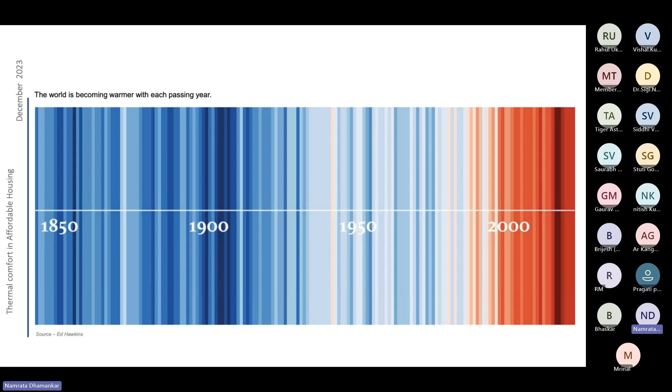Just to build up on some statistics and where we are globally today: we all know that with each passing day and each passing year, we are actually witnessing and experiencing warmer temperatures as years pass by. So what does this actually mean for the residential industry or for the construction industry per se?

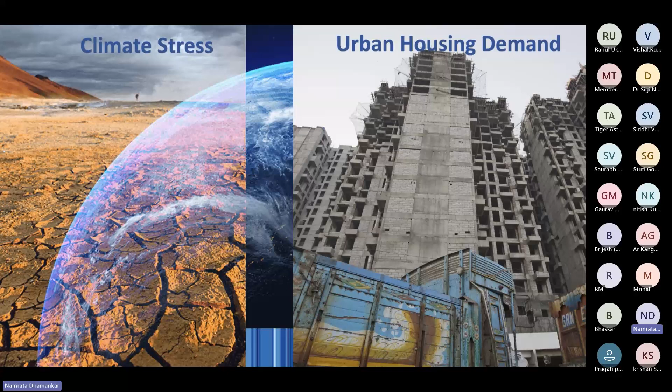On one end, we have the climate stress that we are all undergoing day by day, but along with that, we are also facing a lot of housing demand, as well as a shortfall in this housing demand. So how do we actually balance both these aspects of being climate responsive, relevant in today's times with these climate stresses, and also meet the urban housing demand that we are seeing in a country like India?

We also know that the residential sector in India is expected to rise exponentially in the next 10 to 15 years. But currently, surveys were conducted which actually saw that there is a lot of housing shortage in the urban and rural areas of India.

Government schemes like the PMAY, the Pradhan Mantri Awas Yojana, was one of the initiatives or schemes launched with this particular aspect, to actually reduce this housing shortage that was experienced.

With these policies, or many other such policies that the government has come up with, what we actually see is an opportunity to really evaluate, demonstrate and build housing that focuses on providing not just thermal comfort, but at the same time also minimizing energy and resource efficiency, or resource use, in this entire construction industry.

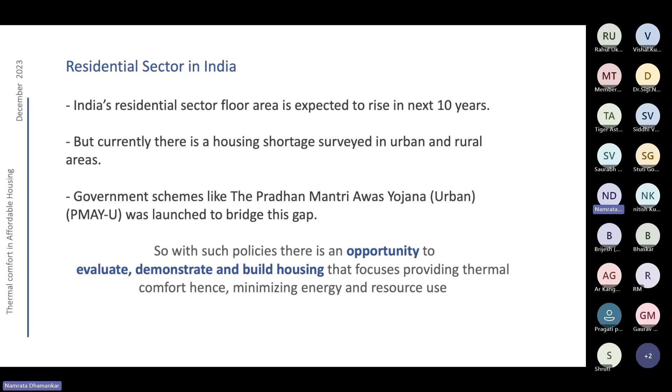So if we start looking at this housing shortage, or now the demand with these government schemes, you will actually see that in the next 10 years we are going to have a huge stock of buildings sprawling all across our urban centers. So how can we use this as an opportunity to demonstrate not just thermal comfort but also resource efficiency? That is something we really need to think about.

But at the same time, due to this shortage of housing and the demand for more residential housing, what has happened over the years is that because they want to scale up and meet these demands, there has been an adaptability of cheaper technologies and methods that can increase the pace of construction and reduce the cost. This has also led to a neglect of actually providing comfortable spaces for occupants, and also leading to the use of technologies which are not relevant in the context of the climate change scenarios that we are facing.

There is also no direct target focus on buildings which are future ready, because we all know that the buildings that are going to get built today are going to be there for the next 50 odd years, right? So how are we actually constructing these buildings today which are actually future ready? How are they actually going to be resilient towards the disasters or the natural calamities that we all are facing? One of them being typically the heat stress, which has a direct relevance with today's topic of thermal comfort.

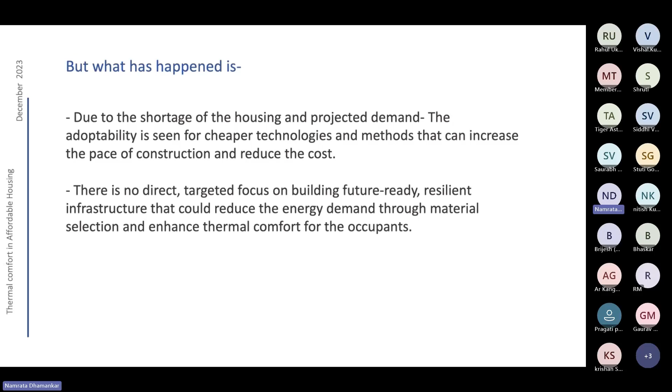And also with the growing energy demand, how are we actually moving towards better material selection? How are we actually trying to enhance thermal comfort for occupants? So this is something that we really need to give a thought to. This is something that has become a real pain point or a challenge for the construction industry.

At the same time, just to talk a little about this particular topic of providing thermal comfort in the construction industry per se, I'm not very focused on the residential sector, but the construction industry in general. There are a lot of codes and standards, or schemes, which actually show the relevance of national priorities. So for example, we have the Energy Conservation Building Code for the residential sector, or the Eco Niwas Samhita, which sets minimum building envelope performance standards, right? To limit heat gain, heat losses, and also for adequate natural ventilation along with daylight.

And also now further including how appliances and energy efficiency along with renewable energy can actually be brought holistically into this entire framework of the ECBC-R. Along with that, the National Building Code was also revised in 2016, which further set minimum standards for thermal comfort and construction practices. So we have that also in place, which is a big standard or code that India practices.

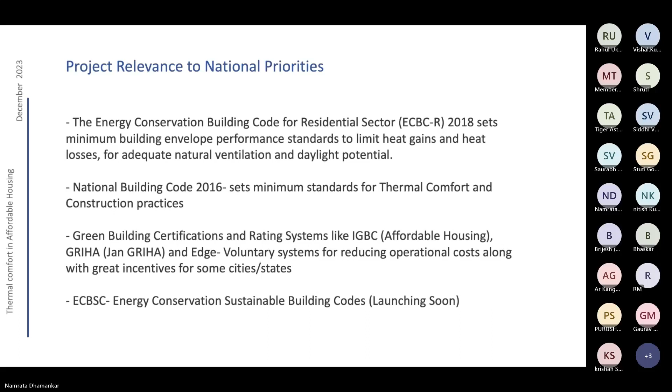And now soon we are also talking about the energy conservation sustainable building codes, which will definitely come to the market soon. There is a lot of work that has been done at the back end to launch these codes. So this also will see a big jump in relevance to this entire national priority that we have.

What also happens in this sector that we are dealing with, which is the construction industry as a whole, is that we have to deal with multiple stakeholders, right? Multiple stakeholders ranging right from the occupant who is actually using these spaces, for example, the homes that we are building, to manufacturers, to architects, to other green building professionals, to government bodies, right till ULBs, which actually certify or look at how these schemes are built, right?

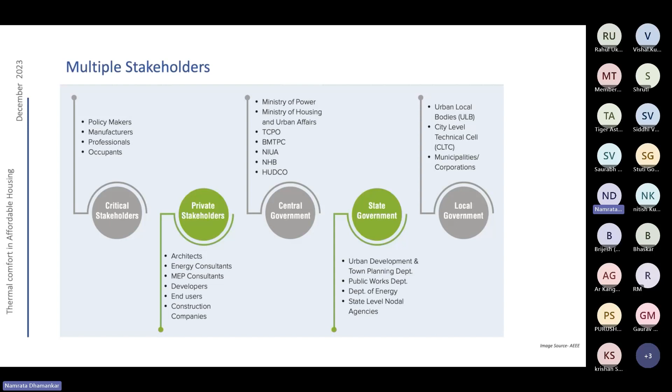So the involvement of these multiple stakeholders and actually working holistically is again one of the challenges, where there is a lot that needs to be done with respect to how we look at this entire gamut of stakeholders that we have, and how we listen to each one of them and bring all of them on one page, right? So this, like I said, is currently proving to be a big challenge for the industry. So stakeholders is something that needs to be addressed more efficiently.

Now, with this background, I will move towards the built environment and thermal comfort, which is the topic for today's discussion. Today we are not only talking about buildings being thermally comfortable, we are also talking about moving towards net zero. We are talking about how the entire built environment can move towards being net zero in terms of energy, water, and waste, and further, how we move towards a net zero carbon built environment.

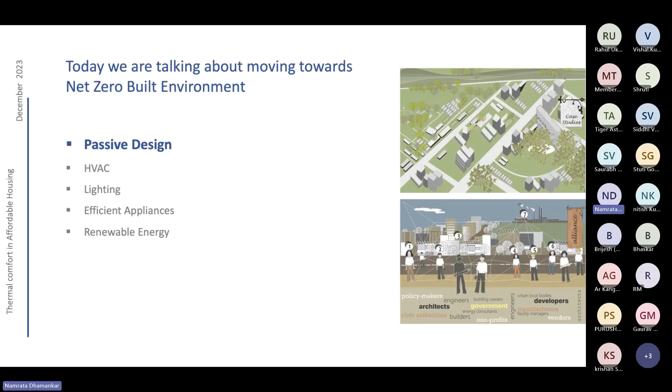A major aspect when moving towards a net zero built environment is passive design, along with active measures like your air conditioning systems, your lighting, your appliances, and the last in the pyramid is your renewable energy. But forming a very large part of moving towards an efficient built environment is passive design; providing passive design strategies in your built environment is a major priority.

So why is thermal comfort so significant? We all know that more than 90% of our time is spent indoors, be it your homes or your offices. When we talk about the affordable housing sector, the cultural context we are dealing with is that the affordable houses we are building are used primarily by women throughout the day.

So these homes are not unoccupied during the day, and there is an urgent need to address thermal comfort not just during the night, but for the entire 24 hours. Thermal comfort not only enhances the ease of living, but also has a direct impact on the active systems and resources that we are using. Thermal comfort holds a lot of significance when we are designing buildings.

The audience here might definitely know, but I'll touch upon what we are trying to achieve with thermal comfort. The objective of any building design is to keep people comfortable. We are designing buildings for people, so it's more of an occupant-centric design.

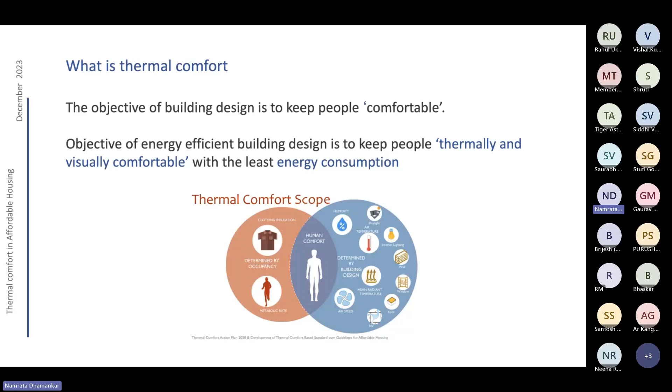Apart from these are the psychological or physiological parameters of thermal comfort, which are very personal to the occupant, such as clothing and metabolic rate. I'll come to this point later, how even the personal parameters need to be accounted for when scaling up to design thermally comfortable buildings.

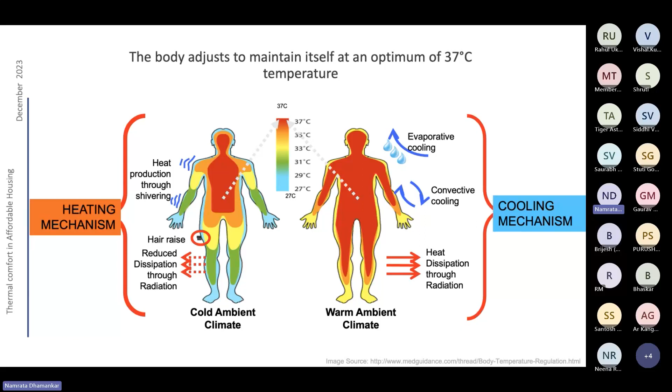The ultimate aim of thermally comfortable buildings is to have a cooling or heating mechanism in place, similar to how your body activates. Our body temperature is maintained at about 37 to 37.5 degrees Celsius. Depending on the outdoor climate, our body adapts by either losing or gaining heat, exchanging heat with the ambient environment.

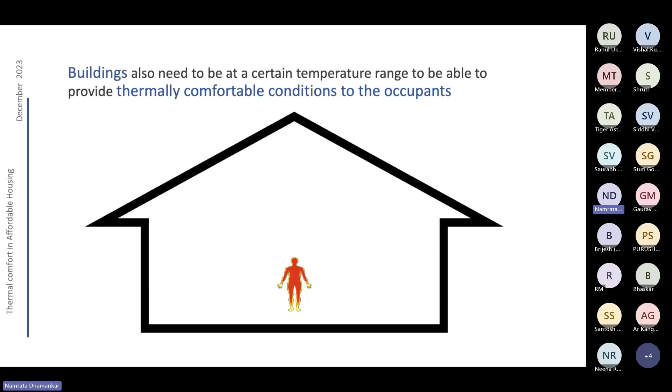Similarly, like humans, buildings also need to be maintained at a certain temperature. They need to be provided with thermally comfortable conditions to provide thermal comfort to the occupants of that building.

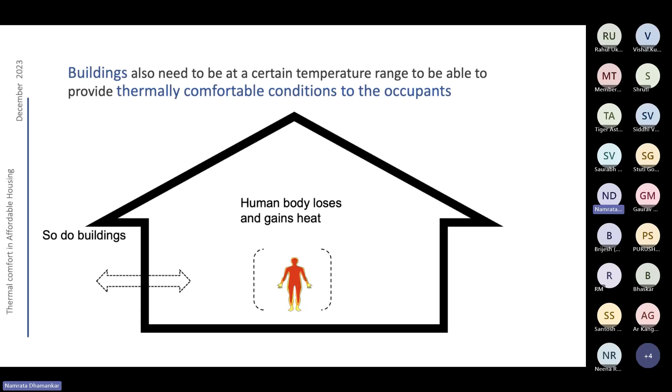So with the heat exchanges that are happening within the building, along with the human body losing and gaining heat, there are multiple other components also that are leading to this heat gain. So I'll just skip this and move to this diagram where we are talking about how this heat exchange is actually happening, right?

The heat exchange that is happening to provide thermal comfort inside is actually based on the three processes of conduction, convection, and radiation. The heat transfer that is happening through conduction, as all of us know, is primarily through the building envelope, right? That is a major source of heat conduction in our buildings. Convection is obviously the parameter of ventilation or air movement in our building to actually take out the heat that has accumulated in the building.

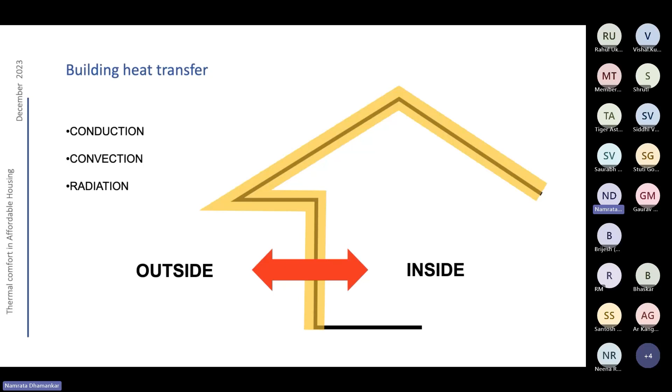And then we are also talking about radiative heat or radiation, which typically comes inside our buildings through transparent surfaces like windows and glass openings. So actually balancing all these three heat transfer mechanisms in our building is what is going to lead to a thermally comfortable building.

So how do we do that? What needs to be done in order to maintain this balance is to balance it out with respect to passive and active means. When we are talking about passive design, we are talking about climate responsive design, trying to encourage natural heating or cooling or ventilation in our building, along with, of course, lighting.

The second part: as designers or as architects, we are not really trying to move our focus away from active designs. But what we are trying to emphasize is how we follow a step-by-step systematic methodology to move from passive design, leveraging the climate responsive design alternatives that we have, and then move towards active. In active also, what we really need is to move towards the adoption of low energy cooling active means, and not rely on just air conditioning that all of us typically know about today. So adopting low energy cooling systems should hold more relevance when we are talking about moving towards a thermally comfortable space.

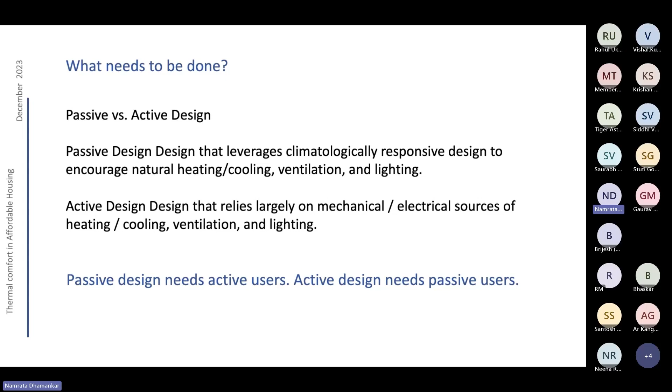So what we are really trying to achieve here is that passive design really needs more active users. We really need to promote more passive design strategies in our buildings when we are designing affordable housing. And we are also further saying that active design needs to be more passive rather than the other way around, which we can typically see today.

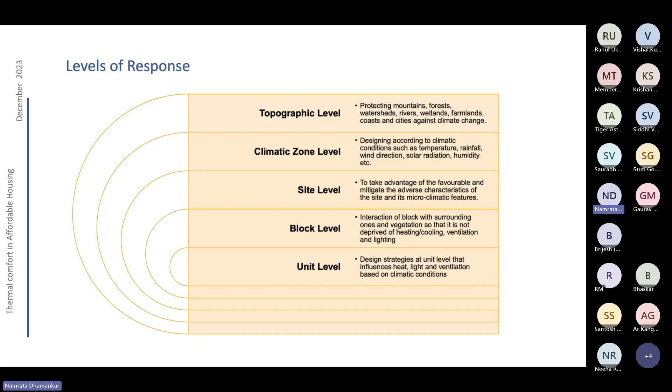So again, with this, we all know that when we typically look at the psychrometric chart, or we look at the comfort zone that most of us are aware about, every climate has its own comfort potential that we can see through the psychrometric chart or through the thermal comfort band.

What we really need to do is first move towards adapting passive means, and once we have that extended comfort band that we can range with, then move towards low energy or more adequate active means that we can adopt into a building to further accommodate higher temperature differences that we see between the indoor and the outdoor.

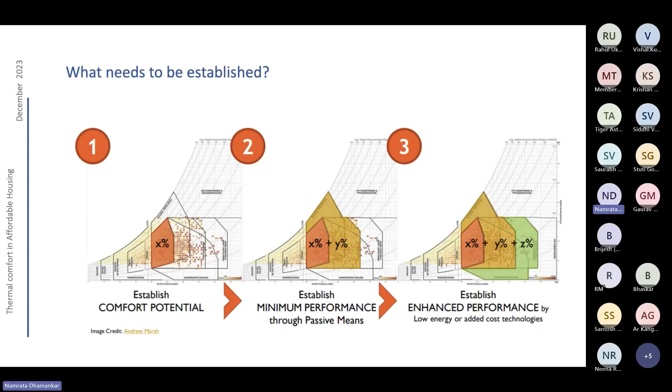Again, I'm not going to talk a lot of details with this, but when we are talking about passive strategies, we are talking right from the form and orientation of buildings, how that should be taken into account. We are talking about orientation. We are talking about how use of topography to actually orient your building, as well as place your buildings in a particular climate zone, plays a very important role.

We are then talking about a very important aspect when we are talking about not just glass or the building envelope, but we first have to prioritize low hanging fruits, for example, shading devices. Shading devices typically are your low hanging fruits, which will give you a lot of benefit in terms of reducing your thermal comfort requirements.

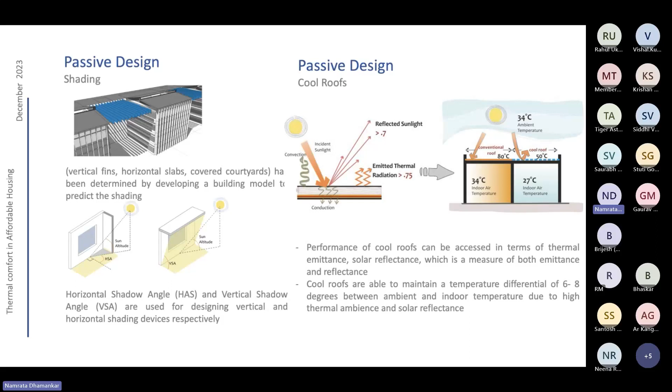And then we are also talking about one more strategy where we are talking about cool roofs. How do we actually reduce the heat that we are gaining through the roofs of our building? So cool roof again can be a passive strategy that can be adopted. Of course, this is more relevant to the low rise building stock, where the roof is gaining the maximum heat, but apart from that, what cool roofs also do at a larger area is actually help you reduce your urban heat island effect.

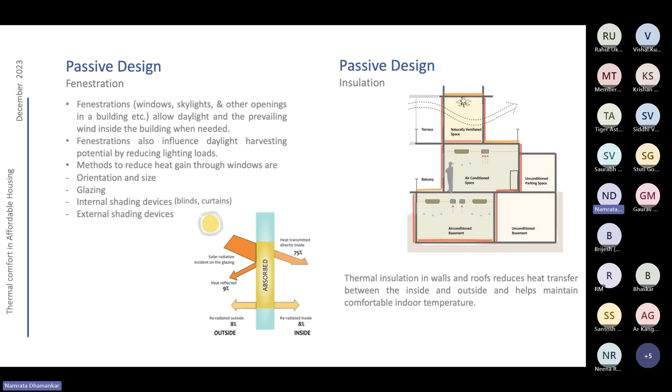Then, like I mentioned, we are talking about fenestration also. How do we actually design our fenestration with respect to the orientation, the sizes, the type of glazing that we are using, as well as the external and internal shading. Insulation, when I say insulation, I'm not just talking about building materials, where you're insulating the entire building envelope, but we are also talking about creating buffer spaces and those kind of design interventions that can actually help us achieve thermal comfort.

Daylight ventilation, I think I've spoken about this. I will move ahead. And then, of course, at a site level, we are also talking about providing more low hanging fruits in terms of trying to create a microclimate on your site with respect to vegetation and landscape features that we have.

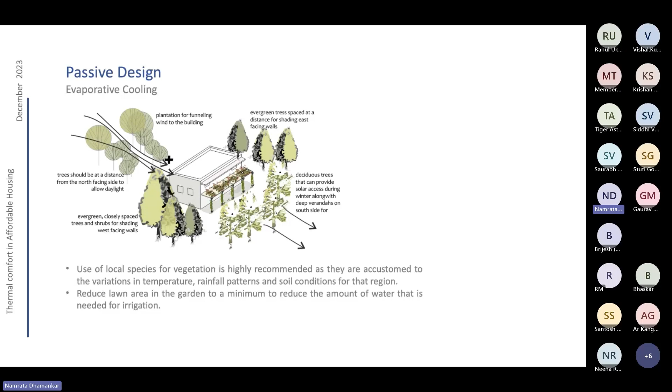So the adaptation of these passive strategies, what will this actually lead to? It's going to definitely lead to a lot of mainstreaming of passive strategies in buildings for thermal comfort. And we all know that it's going to significantly reduce our cooling demand. It's going to provide us good ventilation and lighting in our buildings. It's also going to lead to lesser dependency on mechanical cooling and heating through active means, and also indirectly lead to a decrease in the GHG emissions that we have.

Also, the adoption of these passive strategies in the affordable housing sector or the residential sector is going to lead to greater awareness across all sections of the society. The strata of the society that we are talking about today is the affordable housing sector. Creating awareness amongst them by the use of these passive design strategies is going to definitely go a long way. And lastly, sensitivity in the building practices will obviously tend to decrease the disparity that we see with respect to thermal comfort across the strata of the society or different economic classes.

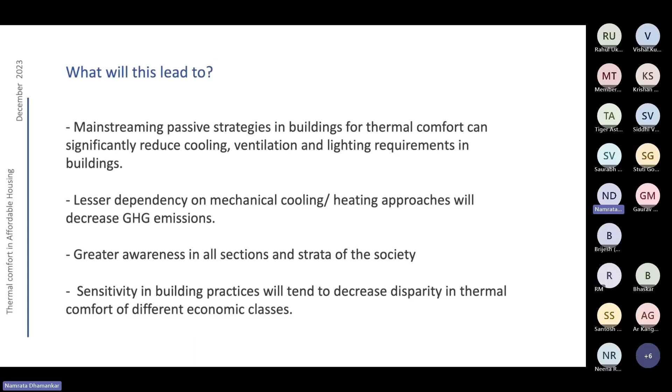Just to talk a little about how building codes today are also already dealing with these issues, but the challenge here remains actually falling back on these codes and compliances to design our buildings. A very relevant code that we need to look at is obviously, like I have already mentioned, the National Building Code. The Eco-Niwas Samhita again has its own challenges. There is a lot of research being done to try to understand what are the challenges that we are facing with the Eco-Niwas Samhita.

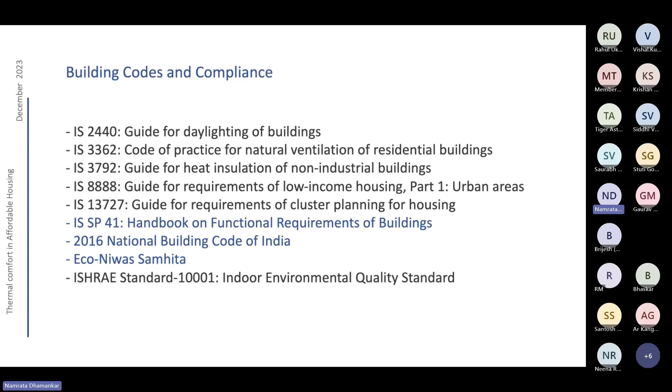We also have the IS SP 41, which is the Handbook on Functional Requirements of Buildings, where we already have indices to look at how thermal comfort is measured. Effectively, there are two indices that the SP 41 talks about. One of them is effective temperature, and the other is tropical summer index.

So again, I'm not going to get into details of what each one of them means, but just telling you a little about them. These are scales or indices which are not really very commonly used when we are talking about designing passive buildings or thermally comfortable buildings.

So tropical summer index as an index is very relevant because it takes into consideration the living habits of the occupants. It's talking about clothing patterns. So all of this together is what this particular index looks at. So it's very relevant that we as designers are using these indices to design buildings which are more comfortable.

So what the TSI talks about is trying to have a comfortable range of 25 degrees to 30 degrees, and optimizing it at 27.5. Further, we also have something which is very relevant as an index today, the IMAC model, which is the Indian Model for Adaptive Comfort. So that has been a game changer.

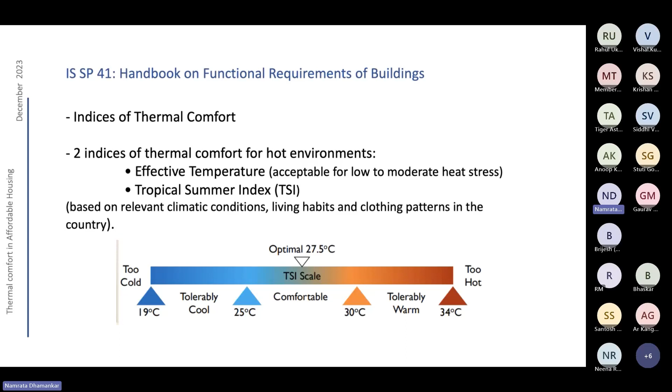But again, the adoption of this index and actually designing buildings as per the IMAC model is something that is not seen in the market today. I'll just move on.

In terms of the challenges, I think I just spoke about this, but designing buildings using passive strategies for comfort performance of unconditioned naturally ventilated buildings. Indices for thermal comfort today are not really used while designing buildings. Extensive research needs to be carried out on dwelling unit characteristics, the building materials used, construction technologies, policies and codes, and how they're getting implemented, from across the globe. There has definitely been a lot of work done.

It's not that it's absolutely not there, but it needs to be scaled up to a level where a lot of post-occupancy evaluation is carried out extensively to identify gaps and come out with strategic design interventions. So post-occupancy evaluations of residential buildings need to be scaled up and carried out extensively, and I hope that we can contribute more towards data collection from existing building stock.

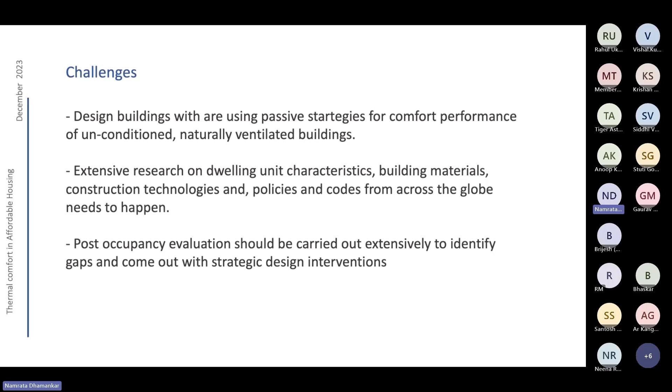Further, after we spoke a little about passive strategies, now we'll quickly move towards active strategies and how, along with passive strategies, we should also adopt low energy active strategies. And then I will end with showing you two works that I have been a part of as case studies.

So one of the newer areas is that thermal comfort is not in isolation, right? When we are talking about thermal comfort, we are also talking about energy demand, which is a very major aspect, especially in a tropical country like ours, the majority being warm and humid and hot and dry. We know that the use of air conditioning and electric fans is on the rise, and the use of air conditioning is set to rise further.

About 11% per annum is what it is projected to rise, and there are studies showing this use of air conditioning is going to go up to 20-25% in the coming years. So what this means for us as designers is: how do we stop this catastrophe that we are moving towards? How do we mainstream low energy cooling systems into our buildings, and scale up these other active means that are in the market?

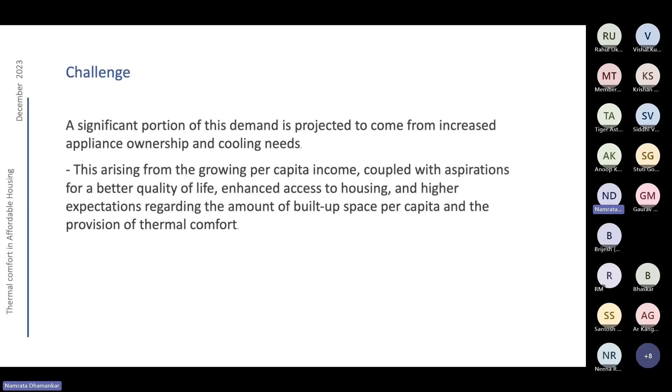However, despite this, we are also seeing that, like I mentioned, it is projected that air conditioning penetration over the next 20 years is going to rise quite a lot. But at the same time, there is still a large section of society that will still not be able to afford air conditioning, right? That again is a very major chunk of the population that we have in our country.

That is again a significant portion of the households that we need to tackle. But here what we are seeing is that even if they can't afford air conditioning, what we are actually seeing in these houses is that they are not even provided with basic thermal comfortable spaces. So they don't even have the bare minimum to the level that they can actually use the indoors they are living in. And this is also happening because of rising temperatures that we are seeing.

Heat stress in our cities is also leading to a lot of accumulation of higher temperatures indoors. Houses that are very poorly designed, not ventilated. So all this together is actually leading to indoors which are very, very uncomfortable. And it's having a direct impact on the occupants' productivity and health as well.

So thus, building climate resilient and thermally comfortable housing for this section of society, where we are talking about EWS or LIG households, will not only reduce energy consumption, but will also contribute positively towards the overall quality of their life and their productivity.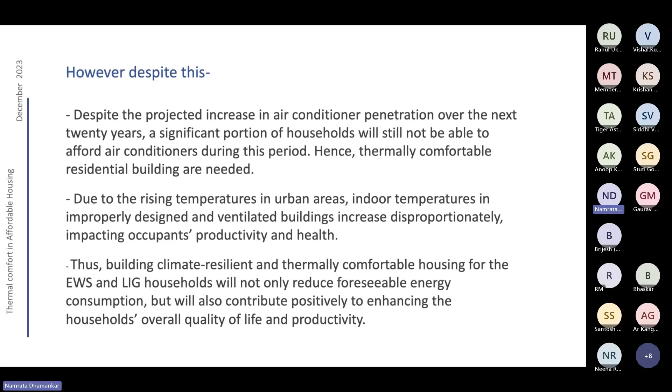One sector I have not touched upon, but will talk about briefly in the case study, is the housing stock related to the construction industry growing multifold. Along with that, what is also increasing is the demand for migrant workers' housing, because in order for us to have these construction buildings coming up, we are also looking at construction workers, and they tend to stay in temporary, inefficient housing. So again, that is something I will briefly talk about in my case study.

A little bit about the drawbacks of using this—there is a lot of research that has been done. Some of us at the institute where I teach have also done research about what is really happening with the ENS, and how it is really a tool or mechanism that typically focuses on just improving the thermal performance of the building envelope, particularly walls, roofs, and windows. One of the drawbacks we've seen is that most of our certification systems primarily use this as a code that we need to follow.

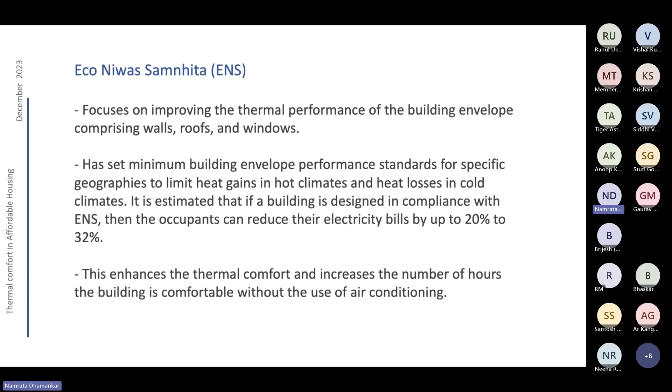But there is no thought given to the fact that a lot of our construction happening today is monolithic construction, for example. There was a study done where we can see that apart from AAC blocks, conventional bricks, and fly ash bricks, one of the major construction materials used today in the housing sector is also monolithic or Mivan technology, as they call it.

Now, if you look at Mivan technology, especially from where I come from, Pune, we see a lot of housing schemes coming up in Mivan technology or monolithic construction. The advantages, of course, I'm sure all of you know, is the faster or speedier pace of construction. But one of the things we are actually losing out on is the thermal comfort aspect of it. With this kind of fallback mechanism, when we try to achieve the targets set by the ENS for a certain RETV value for the building envelope, at times we are not able to achieve this when using construction technologies like monolithic, right?

So how do we address this? How do we actually create awareness amongst developers and builders that this is something they need to look into?

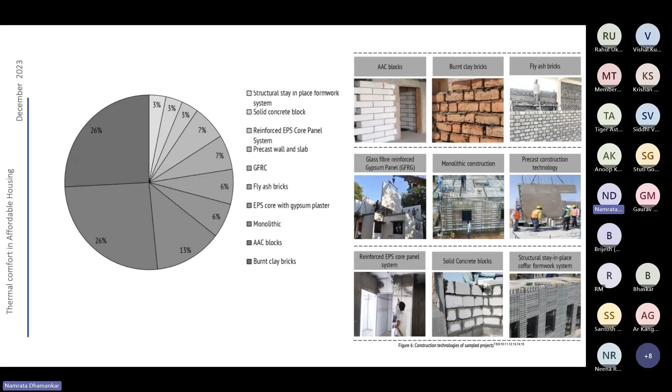Primarily, we know that every building, or the thermal mass of a particular material or wall section or roof section, also has a great impact on providing thermal comfort in buildings, which is absolutely not addressed when we are talking about ENS as a system. So these are again challenges with the codes and compliances that we have, and we really need to focus, look into, or retrospect as to how we can better this up.

Again, we have a lot of affordable certification systems that are there, be it GRIHA, be it IGBC. All these certification systems really talk about trying to say use passive strategies in your building. So as architects, it becomes very relevant for us to actually adopt these passive design strategies when we are designing buildings in this particular affordable housing sector.

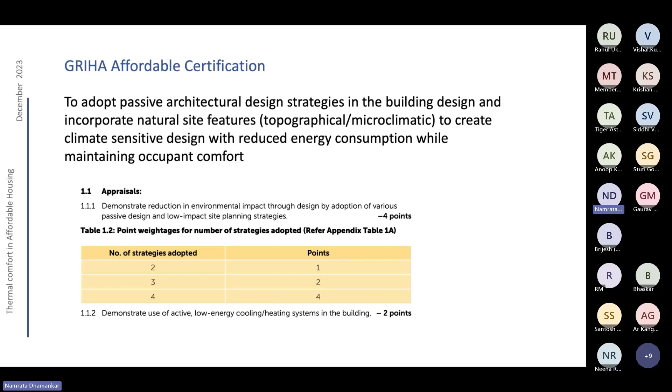So just some snapshots to show you how these rating systems are also addressing this particular aspect. In terms of falling back on the same system of ENS, rating systems are also talking about achieving certain thresholds with respect to building envelope, in terms of envelope peak heat gain factor, and how for different climates there are different thresholds that we need to meet.

This is something we need to look more into detail, because the adoption of these rating systems is seen very large, as the government with schemes like the Pradhan Mantri Awas Yojana has made it a mandate to look at these rating systems as a compliance option as well. But what is really happening is that the material palette we are right now working with is not really adequate, and we really need more research done on the kind of building materials we are using.

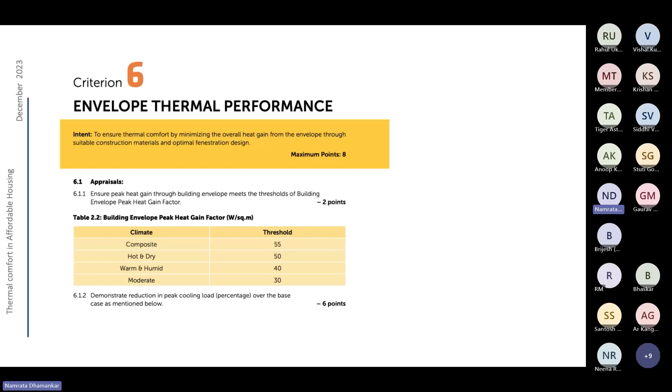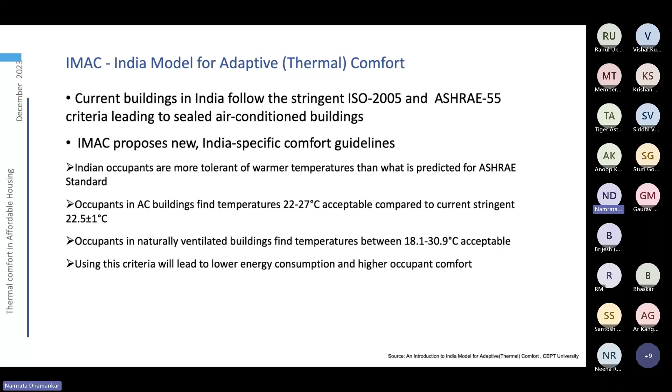Yes, I think we already spoke about the IMAC model. This has again been something that has really revolutionized the entire thermal comfort outlook when we are designing buildings. So again, I'll not really talk much about this.

I think ultimately, this is a reference I've got from an AEEE report itself, that what we are really trying to achieve at the end of it is a balance of trying to look at both passive as well as active means, right? The first prioritization should obviously be given to where we are talking about trying to be lean with better building design, trying to adopt thermal comfort standards, trying to look at the relevant building energy codes that are there.

Then try to be mean when we are looking at standards and labelings of our energy consumptions, looking at intelligent buildings, intelligent facades, trying to look at how we are looking at demand response and systems which are ready for it. And then ultimately what we really need to go for is try to be green when we are trying to move towards a net zero or net carbon sort of scenario.

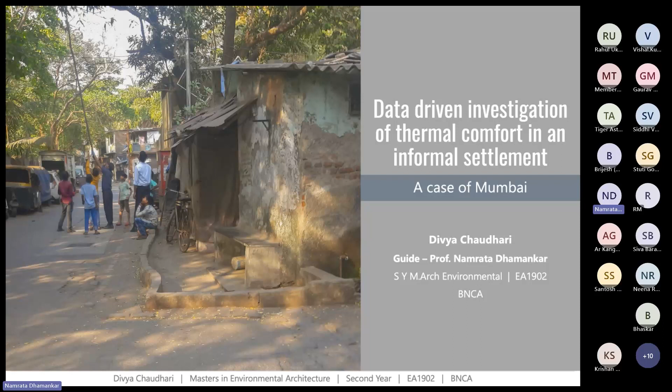So just something that is very different, because I'm sure I didn't want to give you the same examples of case studies which are easily and readily available on the internet, where we are talking about how a lot of work has been done into affordable housing. But I wanted to give you a different perspective, that along with affordable housing, today we are also dealing with a lot of informal settlement, or the existing building stock in this particular sector of informal settlement that we have, and how things also need to change in regards to that.

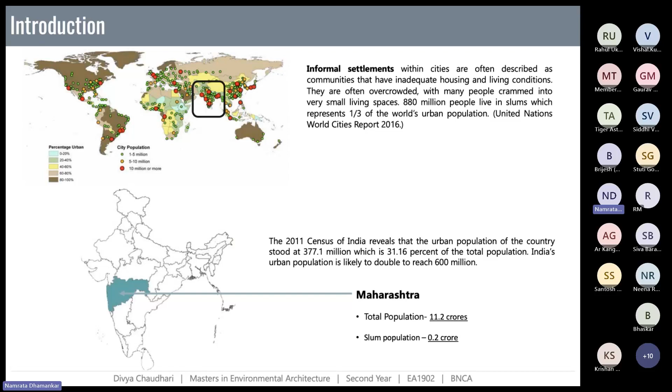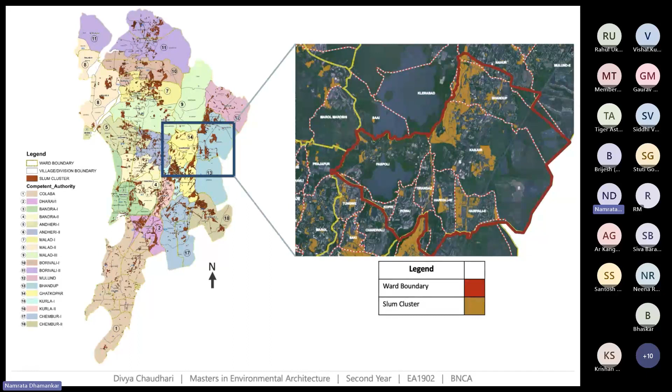So, a small case study or live data-driven investigation for the informal settlements in Mumbai. This was a student, Divya, who looked at how we could come out with solutions for informal settlements, aiming at studying both indoor and outdoor thermal comfort.

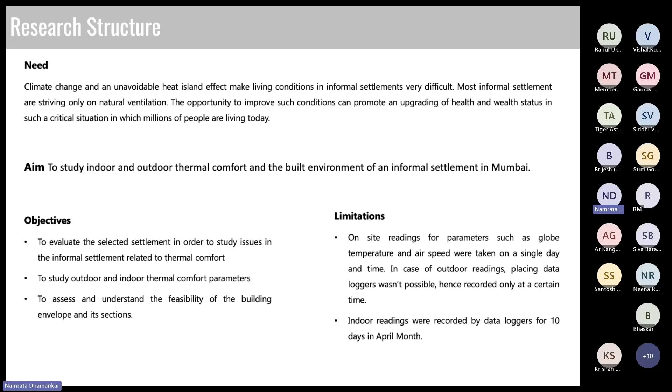The objective was to evaluate the selected settlement for parameters of thermal comfort. She studied and assessed different building envelopes and how they could be retrofitted in existing conditions. She took site readings for air temperature and MRT over a period of time, looking at the current situation in these houses.

She had to relate this with thermal comfort, since that was a priority in her study.

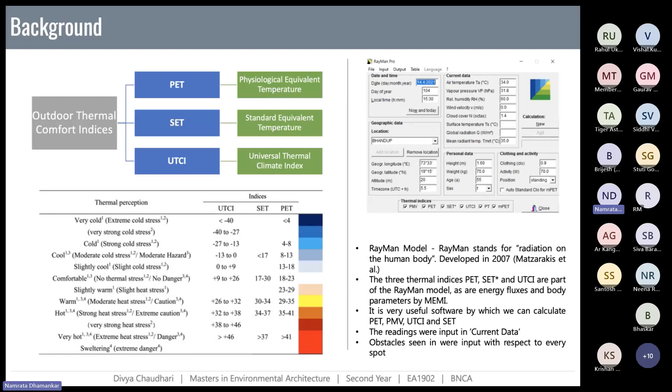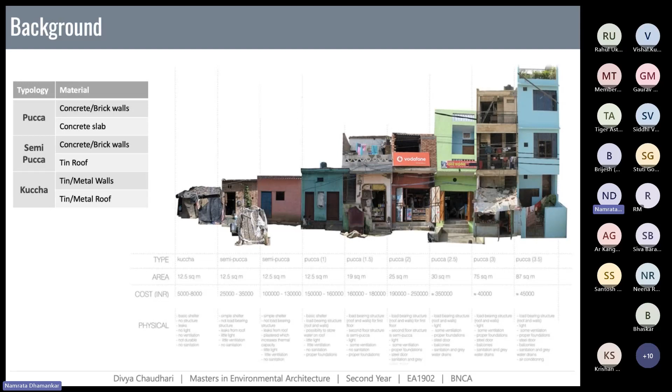So, to give background on the housing stock, the typology ranged from pucca houses built in concrete and brick, to semi-pucca, to kuccha houses which were just tin and metal walls—an entire range of housing within the informal settlement she was dealing with.

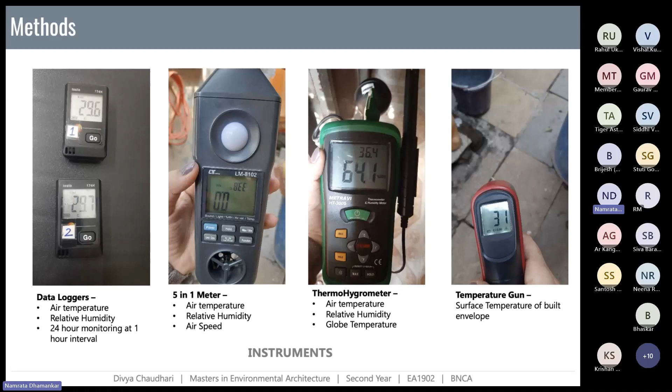Actual on-site measurements were taken for air temperature, globe temperature, and surface temperatures as well. She looked at surface temperatures for the outdoor thermal comfort she was studying, because it was noticed that informal settlement occupants typically spend a lot of time in intermediate spaces between houses.

Occupants spend a lot of time in these intermediate spaces between two houses, and women in particular spend a lot of time outdoors. So both indoor and outdoor comfort were studied.

The temperatures measured were put into the thermal comfort tool and checked for relevance.

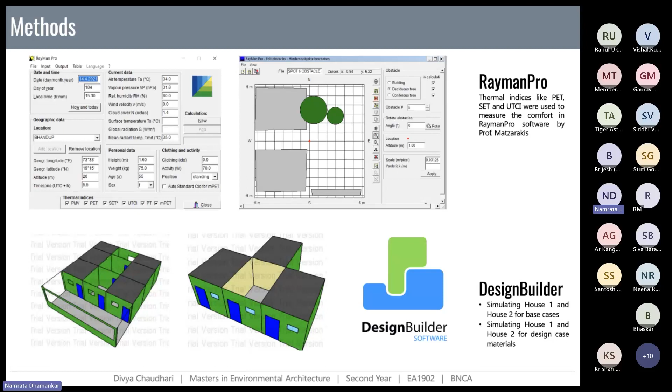There were also simulation studies to understand which roof sections would work. Why roof sections? Because in informal settlements, walls are typically shared common walls between adjacent houses, so walls were never really a problem for heat gain—it was the roof causing discomfort due to its material properties.

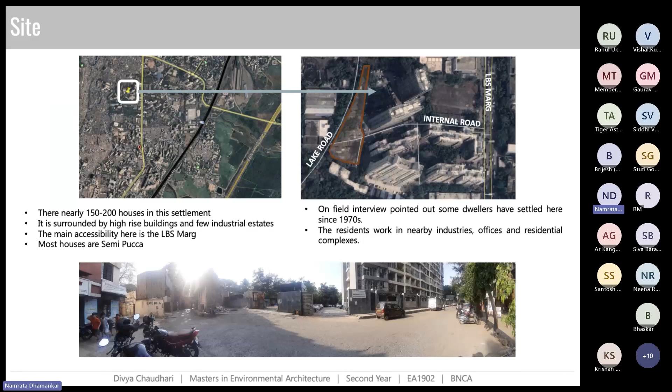Bhandup in Mumbai was the area selected, to study the existing situations we were dealing with.

Two households were taken. One was a semi-pucca house, G+1, with a tin roof and corrugated roofing sheet—very typical of these informal settlements.

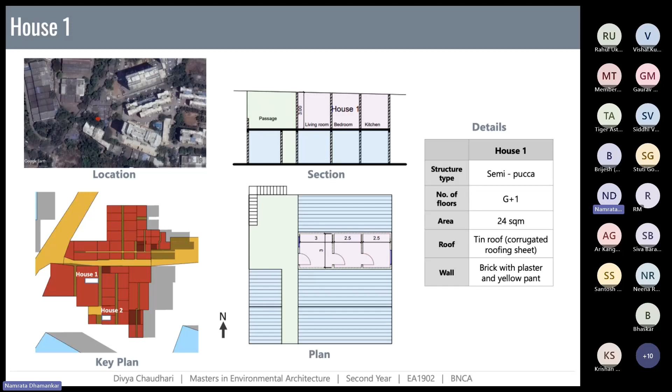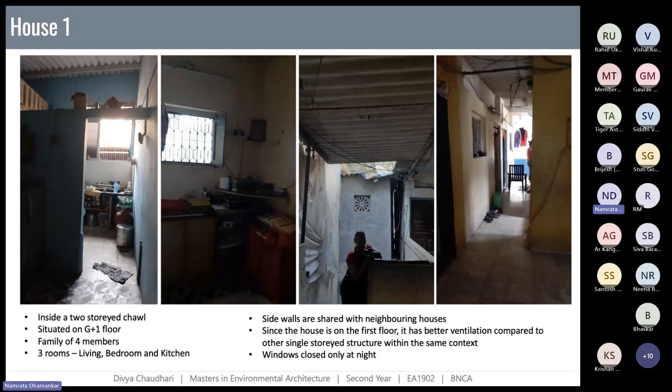We could see the recordings that came in. This is the interior of the house, with just one window filtering some light in. The side walls were shared with neighboring houses.

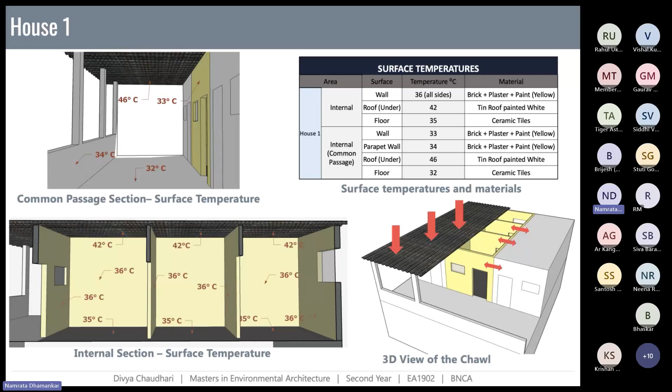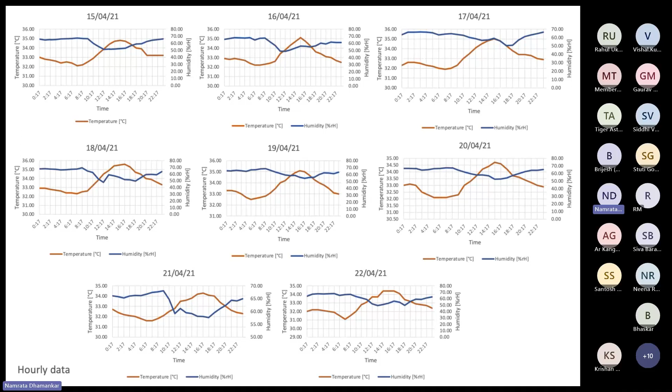Recordings were done over a week's time and the data was collated. You can see a rise in temperatures throughout the day. Data loggers were placed in the house to collect this.

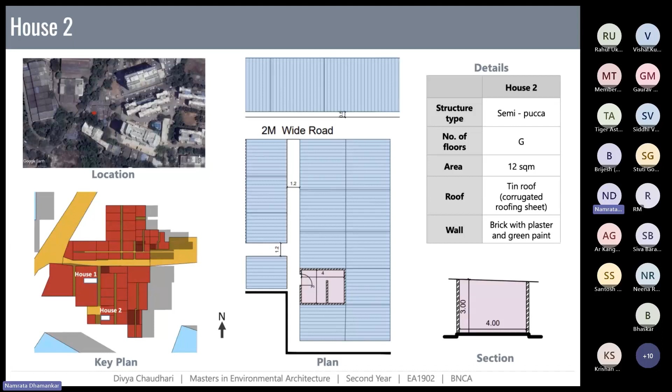A similar study was done for another house, which was only a ground structure, very similar in nature. It was studied for its properties, and similar findings were seen in this case as well.

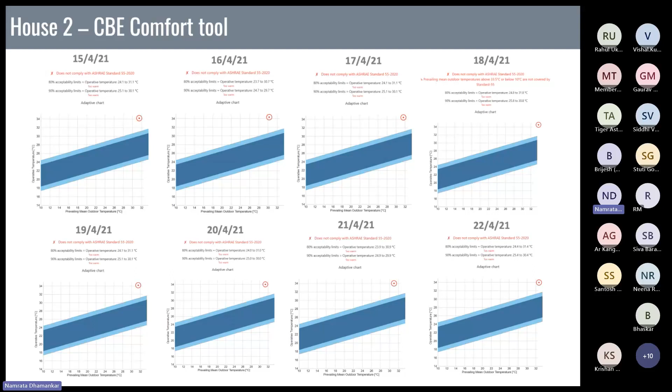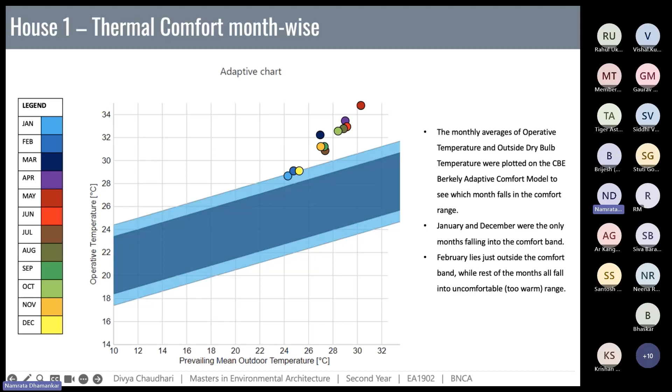So I'll be happy to share this if anybody is interested. I'm just moving on with this.

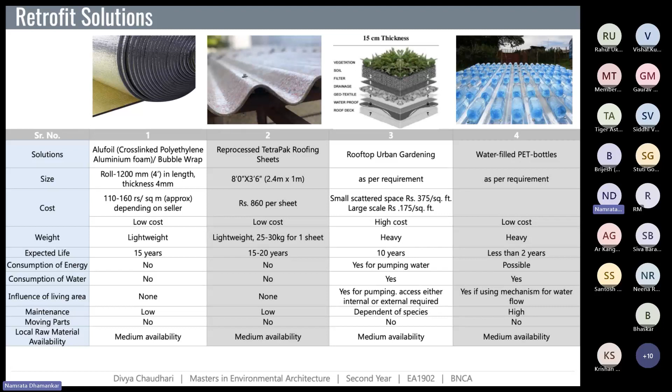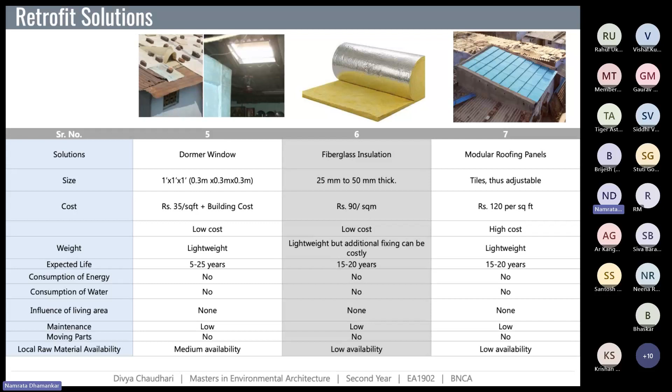One of the solutions was water-filled PET bottles, where PET bottles were laid down on the roof as a strategy, and how they could lead to better conditions indoors. Then there was the provision of a dormer window, insulation, and then some modular roofing panels. So each of these 7, 8 odd options were all simulated to understand how they are performing and which one performs better than the other.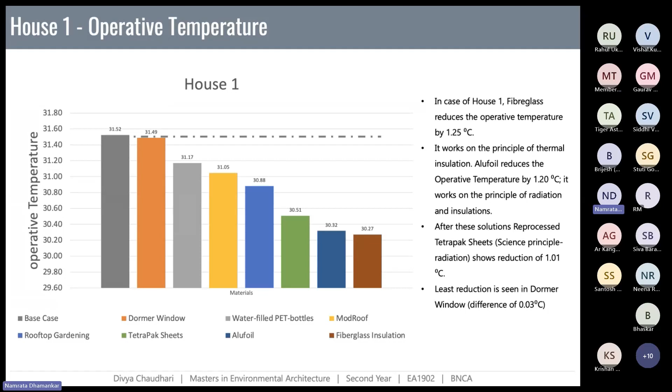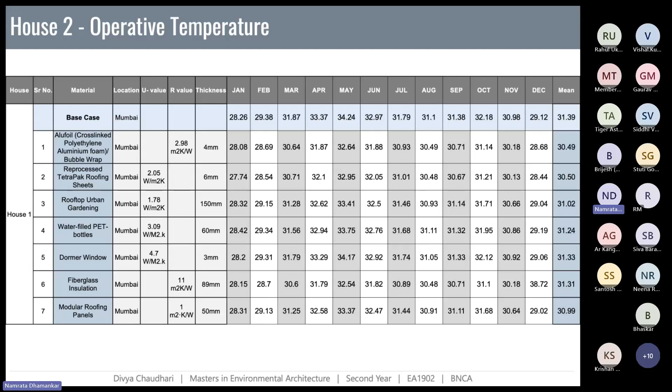What we then looked at was the operative temperature, because it's not the air temperature that impacts thermal comfort indoors, but the operative temperature that really matters. So what ultimately works as a good option is obviously the fiberglass insulation, but then costing becomes a primary concern in these informal settlements. Each one of these was tested, and right now this entire project is being tested in a slum or informal settlement in Mumbai.

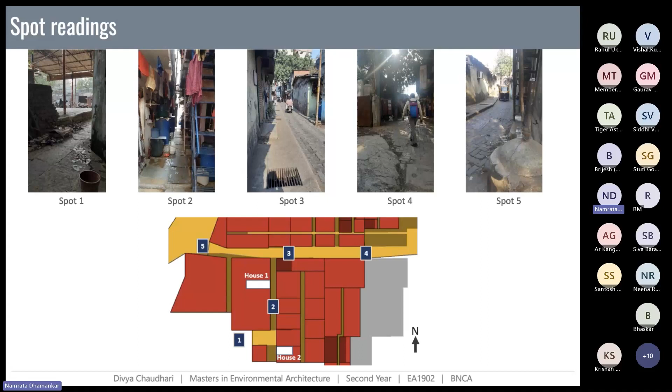We also conducted similar studies for outdoor comfort. What I'm really trying to put across here is that even these informal settlements, which are here to stay, also need to have thermal comfort, which is not seen as a priority. They are informal in nature and have sprawled up over the years, but how we come up with retrofitting solutions to cater to thermal comfort for these occupants is also something that needs to be looked at. And I will share one more case study.

Just give me a minute. Again, I hope you can see my screen.

Yeah. This was something that I presented recently at the Energise conference a month back, which was organized by AEEE. Apart from the informal settlement, another major area for housing that is definitely neglected is the migrant worker communities that are housed on these construction sites.

There was a study that we have done in the last 1.5 to 2 years where we looked at the key challenges of housing provided for on-site construction workers. You can see the images on the left hand side, which are not a very good sight, but this is the business as usual case. You will typically see houses with tin roofs and tin wall panels, just made with these tin sheets and assembled on site, and there for the next 2 to 3 years or the entire duration of the site.

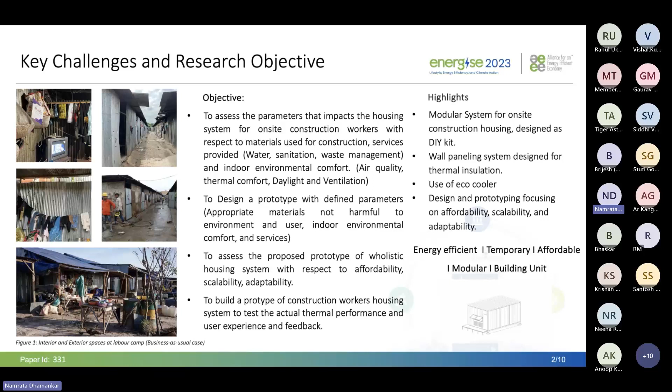There is very little ventilation or lighting that actually comes through in these housing. So all of this was obviously studied and put across as key challenges. Again, a lot of surveys were done with on-site construction workers, trying to understand what their problems were and what their feedback was on the current housing they are living in. The results were something we expected: the indoors were completely dark, and indoor temperatures in summers were absolutely unacceptable. They were not comfortable at all.

So these were things we obviously knew, but this came up as an exercise we did, trying to understand the problems these workers were facing with respect to their housing. And in the same year, we also happened to participate in the Solar Decathlon competition, where on-site construction workers housing was one of the themes for the competition. So we took that up as a challenge.

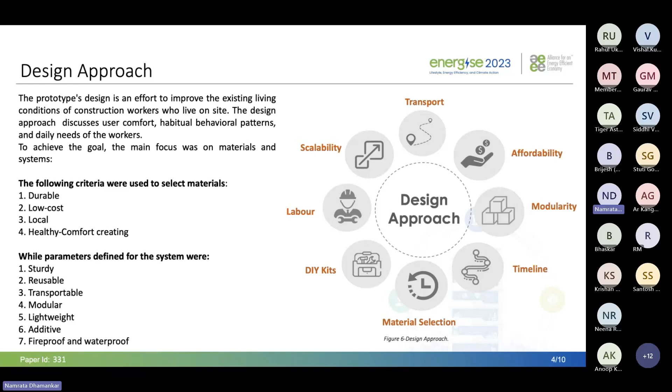What we designed here was an entire unit which was easily transportable, affordable, can be scaled up, and is modular in nature. So we came up with a prototype, which you will see here. This prototype happened after multiple material explorations. Primarily, the materials explored started from PET bottles again, taking some inspiration from the earlier work that I showed you.

PET bottles, if they could be embedded into wall sandwich panels between MS rods, we tried that, and all these options you can see in the images below were actually prototyped. They were made on a small scale, tested, and seen if they could be replicated into a full prototype at a ratio of 1:1. So EPS panel, tetra board, bubble wrap in sandwich, chicken mesh, and PUF panel. A lot of options and iterations were done in terms of material explorations.

And finally, what we currently proposed as a prototype was an MS section with a sandwich panel, and the entire section was honeycomb board. If you see the second image down under, this entire honeycomb board, which is a paper board, was sandwiched within an entire frame.

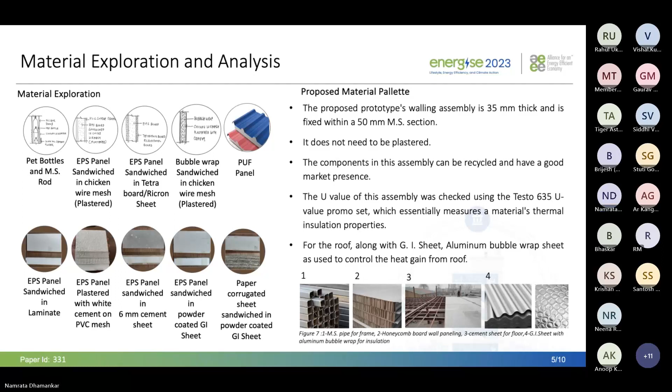So cement boards are currently used, and for the roof, GI sheet with aluminium bubble wrap was used. Better alternatives for this are also something we are working on. This prototype on the right is a 1:1, 8 by 8 feet model that was actually constructed and is still standing in our institute.

But as part of this research, we built this prototype, assembled it on an actual construction site, and compared it with a conventional unit just opposite on this construction site, recording temperature, humidity and U value. So all these tests were done.

Something very interesting I wanted to point out was the base. There is no foundation for this unit. No joinery or excavation needs to be done to assemble this unit. They are just simple discarded paint cans filled with cement and then nut bolted to fix and assemble the entire structure. So absolutely no foundation or excavation is needed. So like I said, this was tested for about 10 to 15 days on site.

We have recordings of it. Also, another interesting aspect that we looked at was ventilation, because from our earlier survey, it was found out that apart from daylight, ventilation also was important, and we all know for thermal comfort, it's not just the material, but it's also the convection that needs to happen for effective thermal comfort indoors. So we designed this concept of an eco cooler, which again needs a lot more work to be done and enhanced, but how we can actually use the funnel effect to get wind or ventilation into the structure.

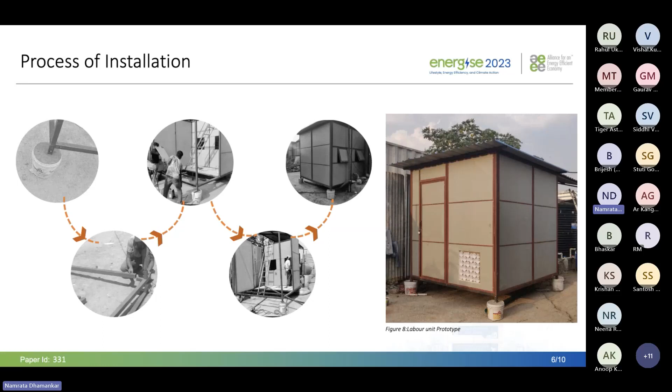So you will actually see that this eco cooler that we have placed is at a very low level in the unit. This is because, again, workers typically don't sleep on beds, they sleep on the ground. So the kind of comfort that is required is at that particular level. That is why the eco cooler was placed at that level. Again, we have seen good results for this, and feedback was taken from the workers who actually stayed in this unit for 10 days.

Yes, so in this also, of course, there is a lot of future research that needs to be done. With the simulations that we have conducted for this unit, the unmet hours or the discomfort hours are still very, very high in this prototype, which we feel should be lowered to produce better comfortable hours. So there is a lot of work still ongoing with respect to this unit.

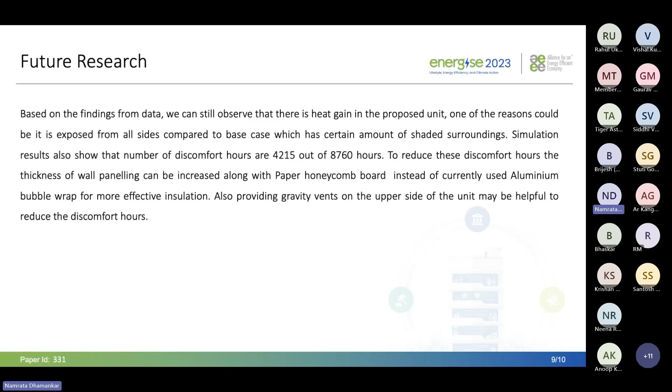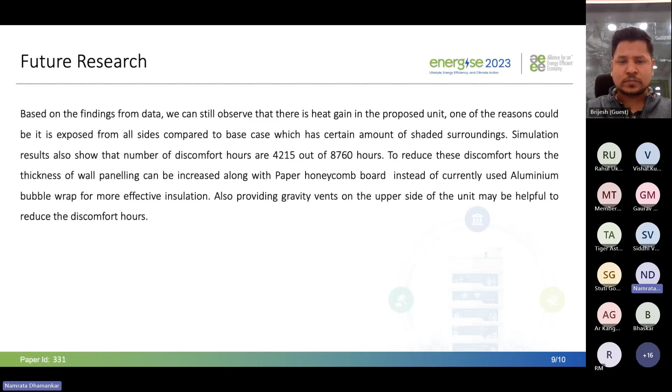But again, what I wanted to really emphasize is how we need to look at these sectors of informal settlement, on-site construction workers housing, how they should form an area of research in the coming years, apart from the regular affordable housing sector that we are talking about.

Yes, I think, yes, so I'll just end. I mean, just something that I wanted to show.

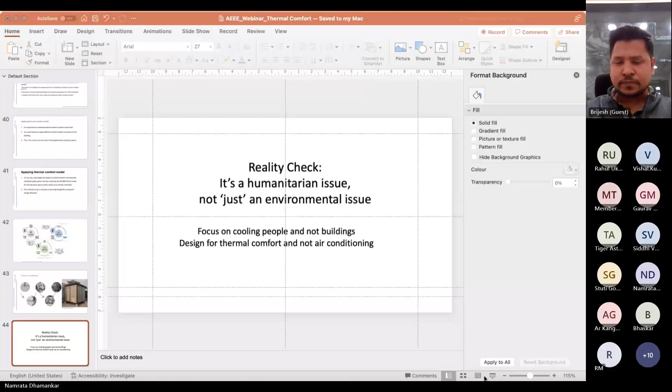So at the end of it, what we are really trying to get is a reality check that it's a humanitarian issue. It's not just an environmental issue, right? So when we are talking about it being an environmental issue of thermal comfort, we are even more so talking about it being a humanitarian issue. It's about occupant comfort, how we can tackle this as a larger issue. And I think what we should really start focusing on is cooling people and not buildings. If we start thinking about how we can cool people and not buildings, we can design buildings for thermal comfort and not for air conditioning.

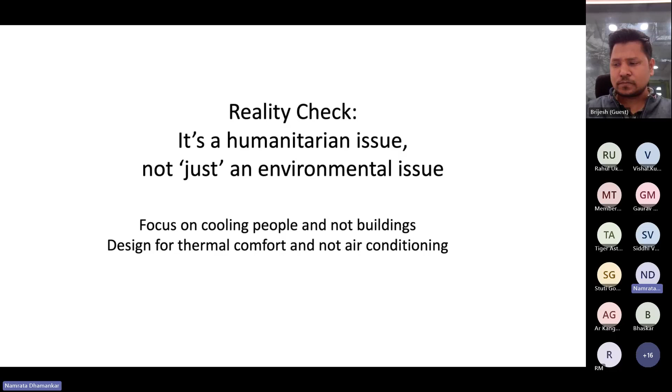Am I audible? Yes. Okay. Hello, ma'am. It was a good presentation. I have two questions. One is regarding the Eco Niwas Samhita, wherein you mentioned that it does not address the thermal mass. What I feel is when we calculate the U value, that itself takes into consideration the thickness of the material. So how is it that it does not address the thermal mass? Can you explain? Would you like to put in your second question also? Should I address this first? It's okay. Please address this one.

So when we are talking about the U value of a material, we are actually talking about the conductivity of the material, right? The conductance property. But when we are talking about thermal mass, we are talking about the storage capacity of the material. So it's very different from the U value. Thermal capacity or thermal mass talks about the capacity of the material itself to store heat. It looks at the time lag of the material. These properties are not addressed through a U value. U value will only talk about rejecting or resisting the heat coming inside, whereas with thermal mass we are talking about how much that material can store heat to transfer it inside at a later period of time.